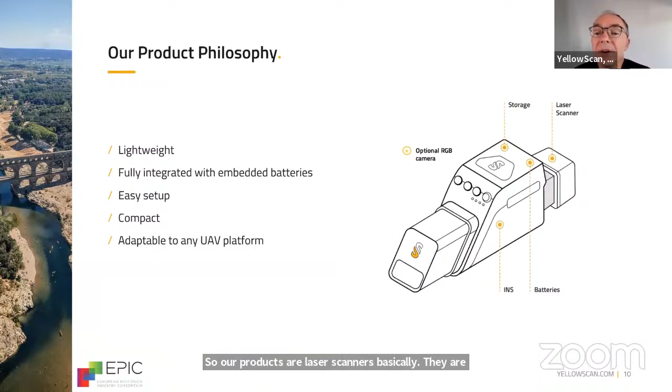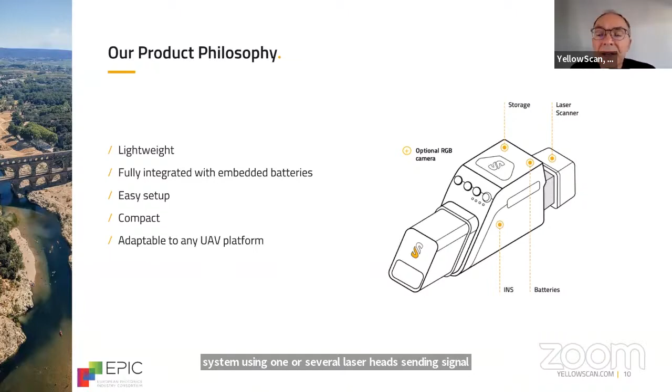So now let's go into the technique. So our products are laser scanners, basically. They are a system using one or several laser heads, sending signal to objects, which can be topography or seafloor, and measuring the time of flight of the signal coming back to have the distance.

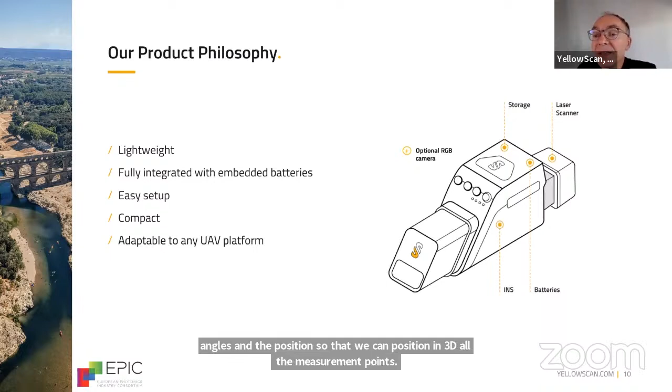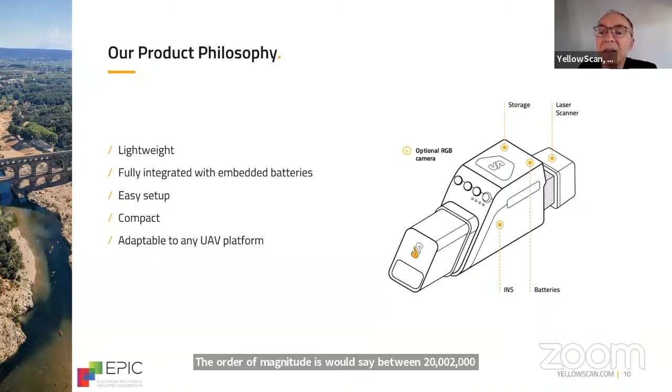At the same time, we measure the angles and the position so that we can position in 3D all the measurement points. The order of magnitude is, I would say, between 20,000 and 2 million points measured per second. So it's very effective systems to measure topography or to measure bathymetry.

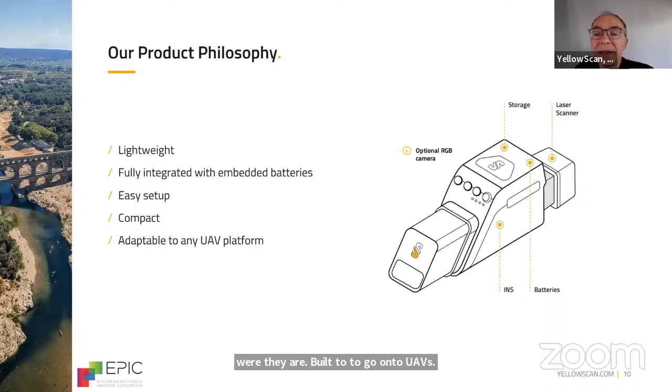Our products are fully integrated with embedded battery and easy setup, so that everyone can put that on a UAV and make some survey with it. Our motto is just press the yellow button, because we tried to simplify as much as possible the process on the field in order to make it feasible also in tough conditions. The systems are compact and light, of course, because they are built to go onto UAVs. Our lightest system is 600 grams and the heaviest is about 4 kilograms.

And there was really a break a few years ago when we decided to make some bathymetric product because, of course, Tristan and myself, we were really fond of making something on the coastal area, which is much more interesting for us. We started to screen all the available sensors, but no one could reach our specifications.

So we started to hire people to develop our own optical subsystems for bathymetry. And so we developed the laser source with the telescope. We developed the acquisition system so that actually our system now is quite unique.

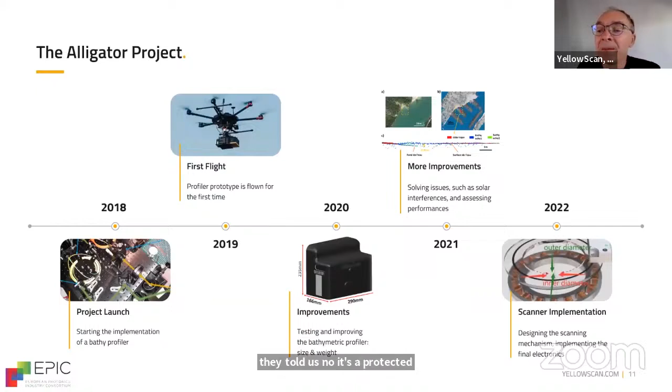And by the way, yes, the research project we had internally was called Alligator in order to make bathymetry. It brought us some strange issues because at the Japanese border we wanted to import the alligator, but they told us no, it's a protected species, you can't import it. So we changed the name into Navigator, which is more neutral and no protected species until now.

So it's a system which can do both topographic and bathymetric surveys. It's using a green laser. So green is of course reflected by ground, so it's no issue. And green also penetrates quite well into the water.

It's kind of an echo of Emmanuel Boss's presentation about how light penetrates water. Actually, the green-blue light is the best compromise to have long range into water. Long range is a few meters, actually.

So we have easy mounting of the system to any drone with the Gremsy, which is a standard connector. And until now, we have about 2 Secchi depth capacity.

So the Secchi depth is the depth which characterizes the turbidity. One Secchi depth is the depth where an object disappears from your view when you look at it. So we can go twice as deep as that usually. I would say typically in some turbid water, it's 1 meter to a few meters. In quite clear water, we can reach up to 20 meters.

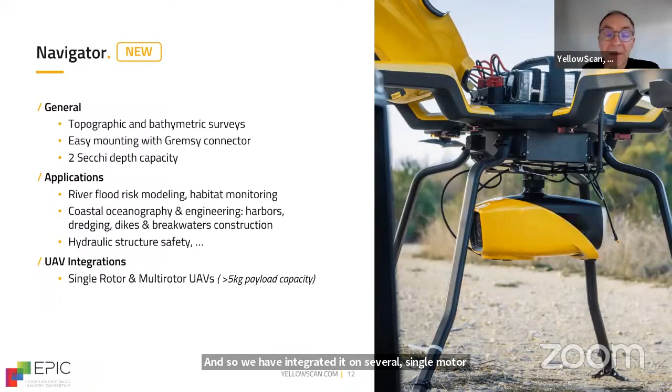Actually, we choose to make some a little bit complex patterns with the laser in order to cover the area with different angles, because sometimes you have shadowing by some obstacles which would impair the possibility to see the bottom. So with these patterns, we can see the bottom through different angles while the UAV is flying forward, so that we have very few shadows.

Okay, so today our wavelength is 532 nanometers, which is quite one of the standard laser wavelengths, and also the most suitable for water. We are still investigating some other but quite near wavelengths to see if in some types of waters, for example more turbid, we could improve the signal by having, for example, dual wavelengths.

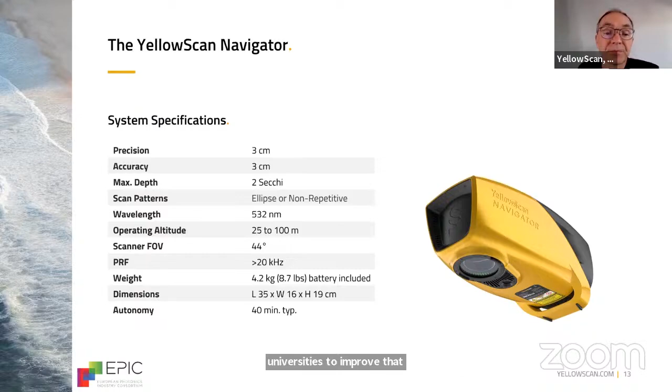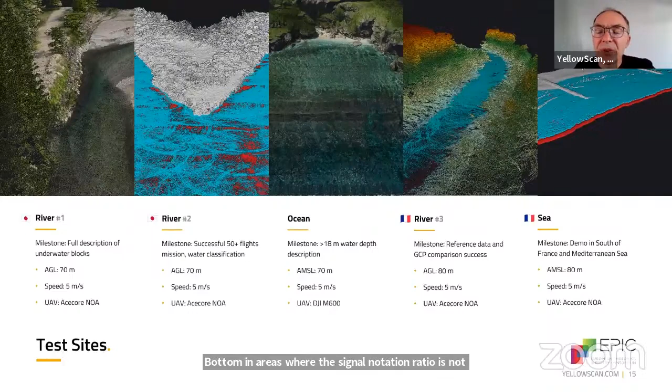So yes, just our motto: just press the yellow button. The YellowScan systems are quite easy to use, and we are working at the R&D level to improve this ease of use. So we are quite interested in cooperation on the post-processing of signal, but possibly also on a more theoretical level on light-object interaction in the maritime environment.

So that's it. If someone has a question.